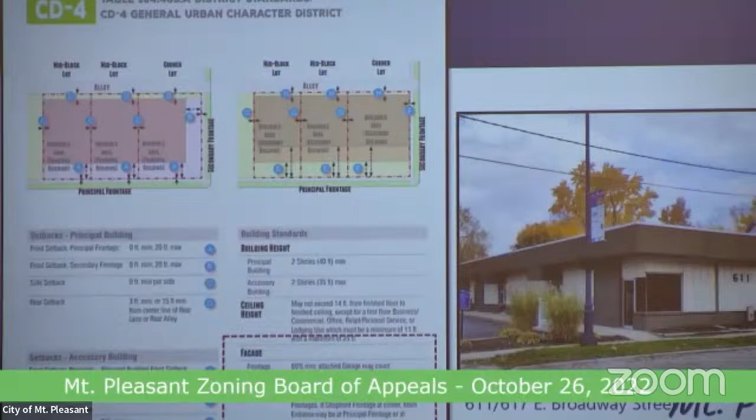Pertinent sections that we're looking at this evening are under the standards under 154.405A. You'll see under subsection building standards to the right. Hopefully you can see this and follow along.

Under the facade, as you note here, under entrances, this says the main entrance must be in the facade of a principal frontage. If it's a shop front on a corner lot, then it gives us some other criteria that we can look at for placement of that entrance.

But this is the pertinent section that we're looking at for some relief here to allow for the building at 617 to be razed and in addition be placed on the family dentistry directly to the east.

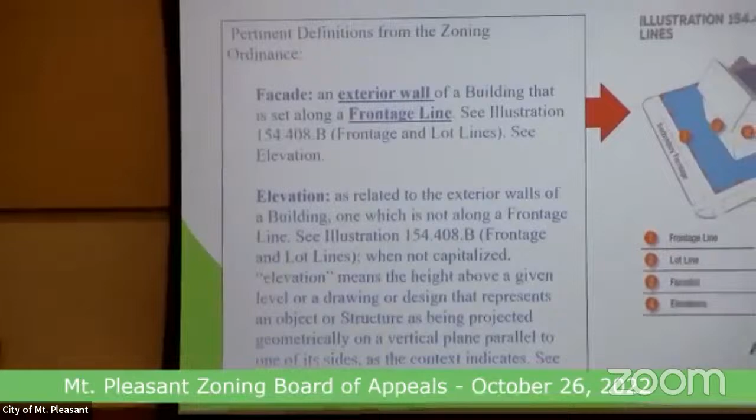So I put these in your report. There's a number of definitions that we'll look at tonight, but probably the most important is the facade, and where we determine what area or what wall is regulated under the standards, to the extent of not only the width, but openings, percent of window openings, as well as the placement of the main entrance.

And so under facade, it says an exterior wall of a building that is set along the frontage line. Frontage line is important. It's an important definition that we'll look at here as well.

Also under elevation, any wall that isn't considered a facade, which is the front wall that is running parallel with the principal frontage, is considered an elevation, and it is regulated a little bit differently.

You can see here, and this is your zoning ordinance, anything that's fronting and is closest, it's the closest wall structure to the principal frontage, is considered the facade. And as we define this, this is right out of the zoning ordinance as well.

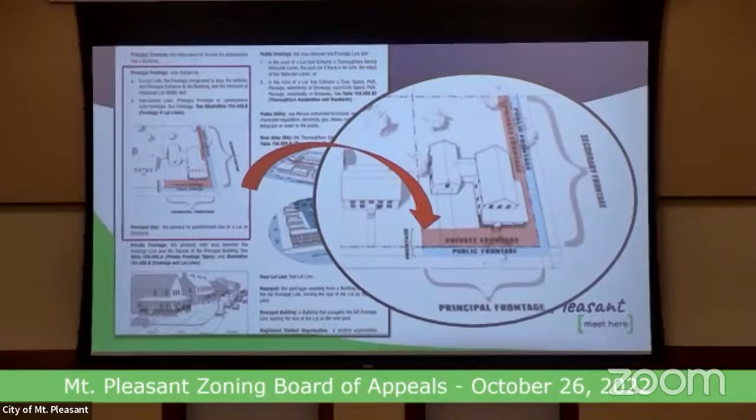The principal frontage is made up of both the public and the private frontage. There's a little bit of both on this site. And the area that is being regulated under the facade is the area that is closest to that front property line. Okay.

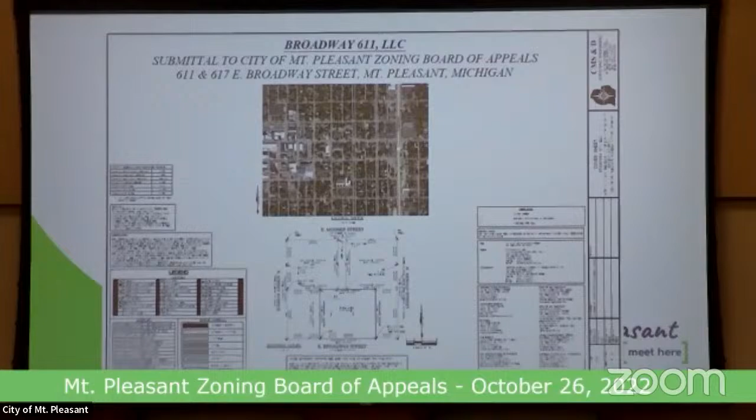I have the site plans here for the applicant. I'll touch on some of the information we went over during the pre-application. We shared this requirement with them, and as a result, they came back with some design changes, trying to accommodate some of these items in the zoning ordinance to make improvements.

We're still dealing with existing conditions, as the dentist office would remain in operation during renovation. Moving the access to the front of the building caused a lot of interior changes, which may have required closing the business. So one of the things they came back with was an improved entrance on the west side of the building, with a covered walkway out to the public sidewalk for a better pedestrian connection. You'll see that in their drawings.

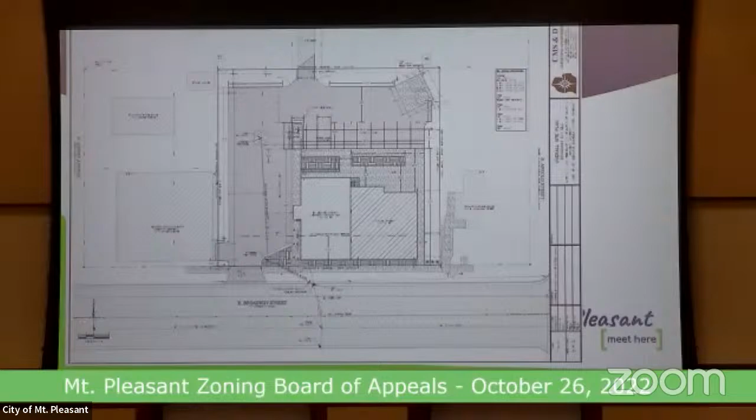Just another illustration of the area and how we define it. Private frontage is about 2 to 3 feet in front of the building. I think they had some landscaping and lawn areas that would be preserved or maintained throughout the development, or improved after the addition is put in place. And then, of course, the public frontage—that's the area where the facade, and normally our main entrance, would be on new construction.

You have this in your packet, which gives us a sense of where the existing building is and how it's made up. In their application they talk about trying to preserve some privacy while maintaining access points into the building. They would add a vestibule to improve the entrance feature coming in from the west, and they would maintain the reception and some of the current interior layout. The addition is here, with their layout extending back to the east.

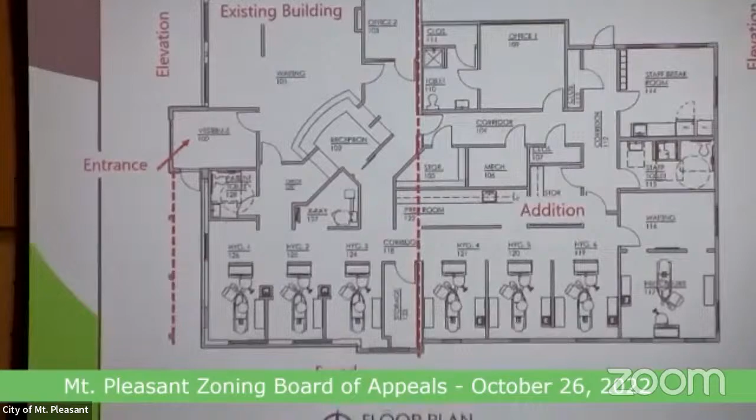The building type is considered commercial. Their design fits within that criteria with the exception of pedestrian access, which is what we're discussing this evening. You'll see the design features improved on the west side to make that connection to the public sidewalk, including the covered walkway.

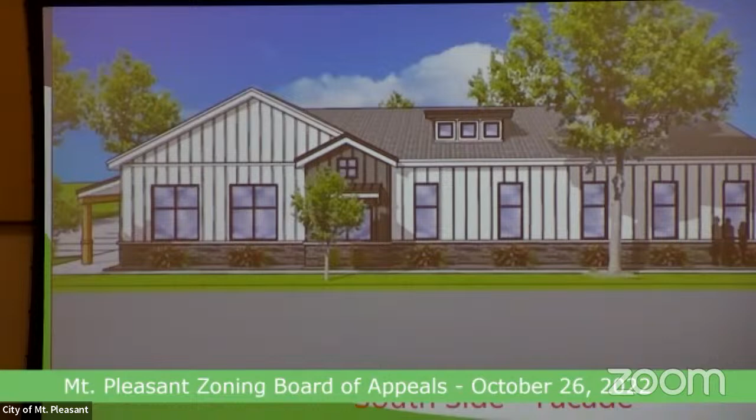I'll let them talk a little more about building materials and design, but during the pre-application we met with Mr. Beebe, who did the site work, along with their architect, and Mr. Tyson, who is the builder on this project.

That concludes what I have to share with you this evening. Do I have any questions from the board at this time?

I have one question, Brian, just for everybody's edification. Obviously, where the entrance is now was fine under the previous code. I'm trying to understand why the new code would insist on a frontage and an entrance fronting on Broadway in this instance, when the parking and everything is on the side. I'm just interested in the background behind that change.

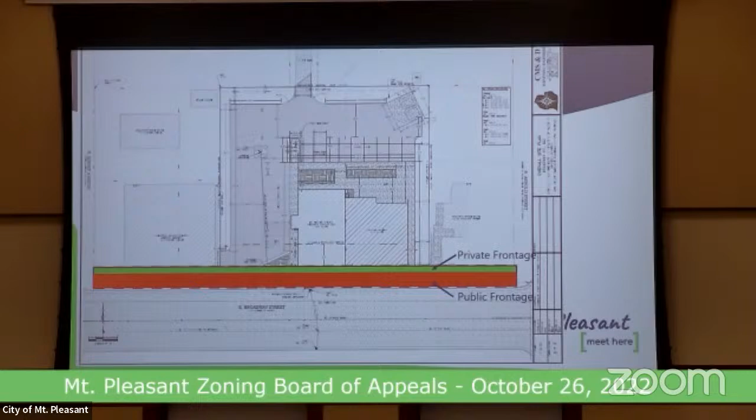What we want to go through is just to rehash some of the items that Brian talked about—the private frontage and the public frontage, and we see that there's this 3-foot gap. When we met with city staff, one of the best things that's happened over the years is we've had this pre-application meeting that we go through, and each department gets to let us know. We bring in a conceptual and they let us know what the issues are going to be.

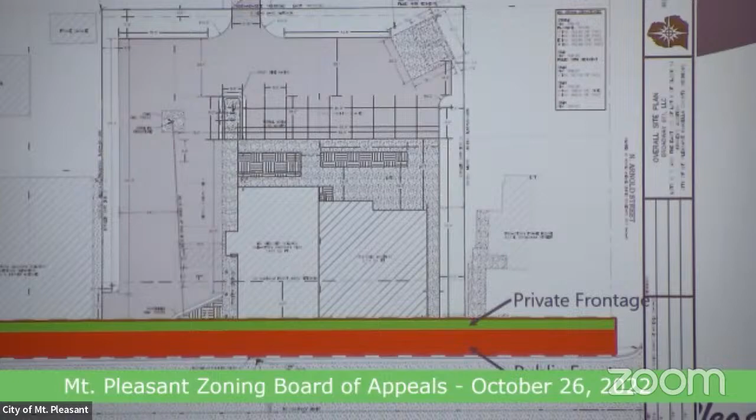Main issue that came out was that specifically in the ordinance, it says the entrance must be on the facade. So we talked about that and said, well, can we put a false door in, can we make it look like that? Well, why would you want to do that? We have to have a controlled access point—this is a medical office, they have to check in, they can't get back to where other patients are, we have to keep them where they are. And oh, by the way, I want to run my business while you're doing the construction.

Well, what do you mean, you're not going to move out? So we had to try and figure out a way to keep the parking lot functioning, keep the access functioning, keep her business functioning, and be able to turn this guy loose so he can build that next portion of the building, so that she can move into the back portion of the building, so she can have the front part facelift—because there will be some work in that existing area. You're not going to have a brand new building in the back and walk through the tired front. So we've got to keep her in business and keep that access restricted.

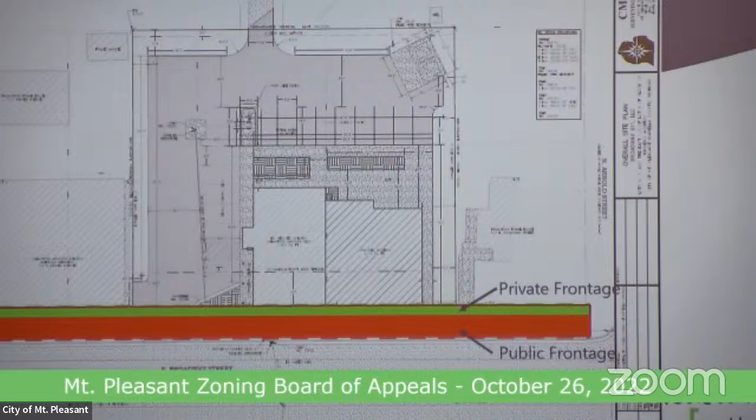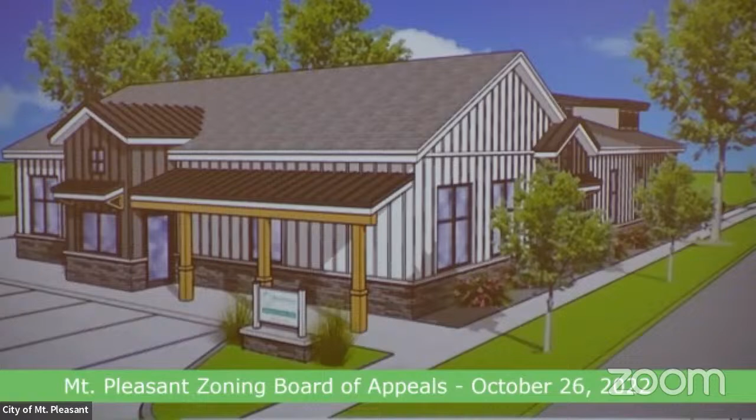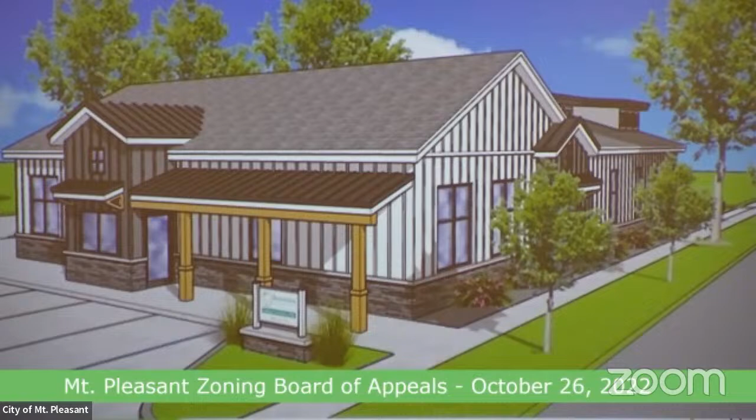And so there was a lot of brainstorming going on about what we could do. And what we came up with—this entryway bump out was placed so that the doorway, instead of coming out directly to the west, actually comes out to the north, which is to the front, south—I'm sorry, to the south towards Broadway, which is that front-facing street.

But it's supposed to be within that green area. We couldn't get that, but we could add on to the building and bring an access way up to that same point, giving the best feel that we could give to try and meet the requirements of the ordinance without having to change the interior of that building and move access points. So we brought it to Brian. Brian said, looks like a good compromise, but you're going to have to go to the ZBA because I can't make this ruling.

He said, I know the intent, but short of building another building right next to it and bringing it out all the way, basically enclosing that, I can't say that that's a building. That's a walkway, that's a porch. So it has to come to the ZBA.

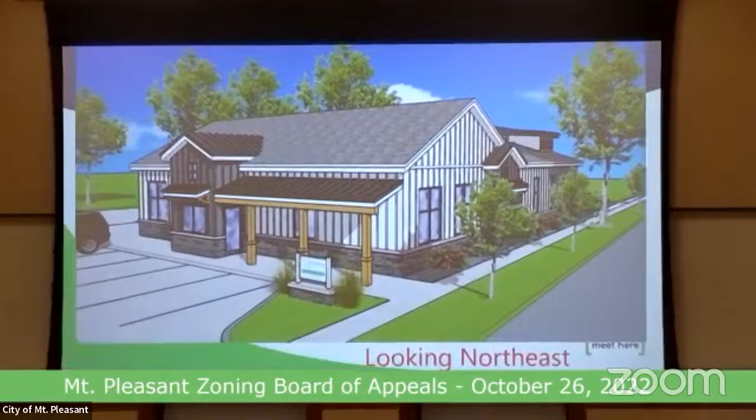So what we're hoping is that you take a look at what we're proposing. We have a parking lot existing, we're expanding off the backside. The backside is primarily going to be for the employees, and you'll see an employee access point in the back. The patient parking is going to be on the west side, which normally they would have gotten out of their car and walked directly in. The only thing they'll have to do differently is step to the side and come in and around. We're supposed to make the site pedestrian friendly. So we're bringing that access all the way out to the street line so that anyone coming or using street parking can get onto the sidewalk, come down, go under the canopy, and come in.

The challenges that make it unique: it's an existing building, existing parking lot system, existing business that still needs to run. And we're adding all the new building to the back, which is all patient area, not the entrance portion.

Can I jump in? Sure. As Tim mentioned, there was an original concept intending to try and utilize as much of the existing building that was in place, for obvious reasons. If we can utilize it and not have to modify it, it would be beneficial to our client while they maintain operations, but also just in general to not have to reinvent the wheel, so to speak.

As Brian mentioned in his presentation, the entrance had been built that way in a previous rendition of the ordinance, assuming to have been in compliance at the time. So at the time of the pre-app, as Tim mentioned, we put this addition on, projecting out to the south. Our client is very interested in maintaining a pedestrian-friendly entrance and accommodating people who are both walking and potentially biking. If you look at our plan in a different view, the floor plan, you'll see we have a patio area out back with some green space, and that's where our bike rack will go. So the intent is to make that a welcoming area. While staff may park there, we're still trying to accommodate the folks that are on bikes and potentially walking.

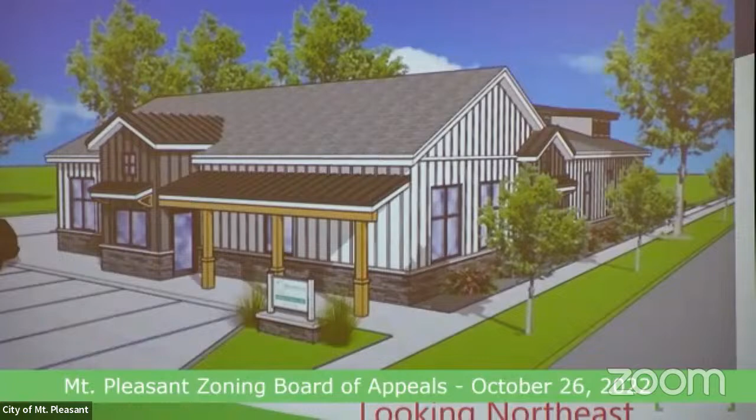To be honest, Peter, I tried hard to convince city staff that we were meeting the intent there with our entrance facing Broadway. That's why I think Brian spent so much time with the definitions. Because I picked them apart, right? I was looking to try and capture that existing entrance as a plausible option. Yeah, it doesn't per se meet it, but it's helping, it's nodding toward it. I see also that you've got what could be three emergency exits toward the back. True.

So that's good with all the walls in here. The other question I have is, there had been some concern about this particular area of some ground contamination. Have you guys dealt with that at all?

There was an environmental assessment pursued at the time of the purchase of the property, and it came back clear. So we were still under that. The only reason I was asking is if it was just the building per se, your client's building is fine, but since you're demoing that gray house, I just wondered if that had occurred at all. But if that's not an issue, fine.

When the contractors demo it, if they run into asbestos and things of that sort, that has its own set of rules for demolition. So if that's what perhaps you're thinking, that very well may be.

We'll be dealing with the abatement of that building separately with its own demolition permit, and we would cross that. I think that plume runs to the river, so it would go the other way.

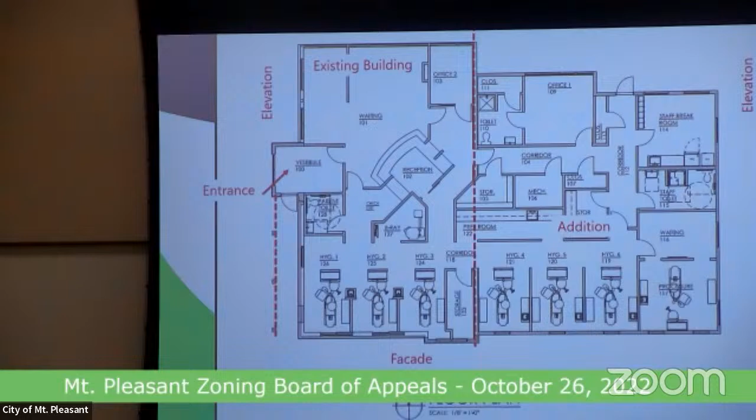Okay, if you look at our floor plan, in the middle of the page you see a dashed red line indicating separation between the existing building and the proposed addition. It's labeled Storage Room 123. We identified this initially at the pre-application meeting as a possible door location. When you look at how that would allow a person to walk into this facility, it puts them right in the middle of the patient area without having been checked in.

Right, and so we did consider that a possibility. I don't know that we feel an obligation to forecast what a future use might be and where someone's preferred entrance might be, but we wanted to try and tie our proposed solution in with what would be the front facade.

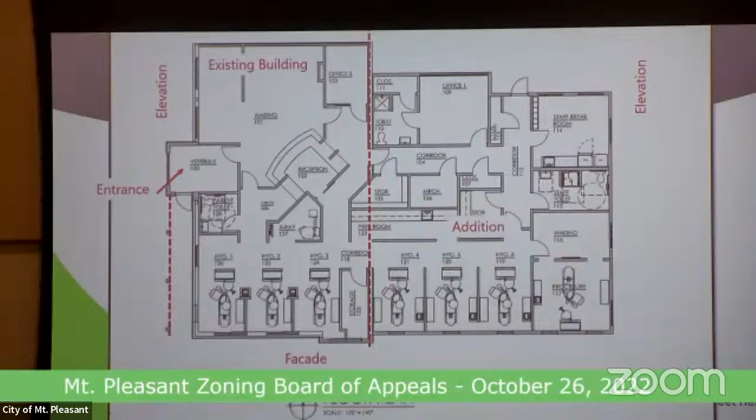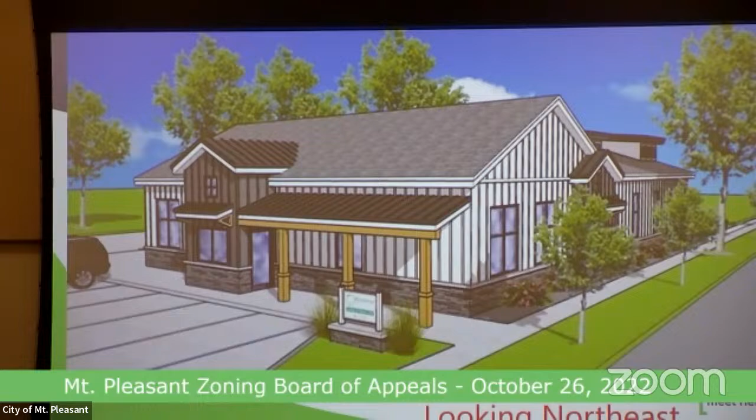So I'm going to attempt to go back to this view. You see our proposed entrance has an alternate color board and batten material. We have mimicked that same design feature on that front entrance in that location. So while we won't actually be installing a door, we're trying to lead someone to that conclusion that if perhaps it changed in the future, that would be a logical location for that door.

Yes, thank you. Thank you. Sorry to interrupt, Mr. Kinch. Let's go back, that's fine. Any other communication? I think that's it, and those will run with our minutes.

One thing I will share is that assuming they get a favorable approval this evening, this case would actually move into the planning commission for site plan approval, and then they would go through a separate review process for building permits, which would include some of the things that the fire department has outlined in their correspondence too.

Let's discuss. Yeah, I think this is a pretty clear project, so I think we probably move ahead to the findings of fact. Let's move ahead to the findings of fact.

All right, let's go through the findings of fact. Number one, that there are exceptional or extraordinary circumstances or conditions applying to the property in question, or to the intended use of the property, that do not apply generally to other properties or classes or uses in the same zoning district. Exceptional or extraordinary circumstances or conditions normally include exceptional narrowness, shallowness, or shape of a specific property on the effective date of this chapter, exceptional topographic conditions, or other extraordinary situation on the land, building, or structure, or use or development of the property immediately adjoining the property in question.